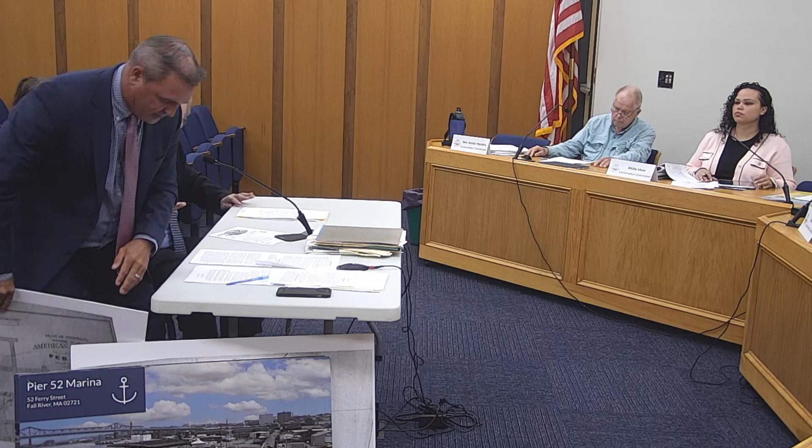So for the sake of having it made, I figured I'd at least show it, because we all know it. This goes back to 1840, and this is the bottom of Ferry Street. As you can see, in 1840, American Linen already had a large building for their industrial use. And since 1840, it's been a variety of things. The most recent was an oil terminal, where oil came in by barges, was recycled, and then left by truck. That oil terminal went out of business and closed down.

And I would suggest to you that under the statute, that seems to be an unproductive property, and what we're here before you for is to revitalize that property.

The issue when constructing on the water, below mean high water, is whether the land under the ocean contains shellfish. Now, statutorily, 310 CMR 912, the proposed project is a water-dependent use. A water-dependent use is described as marinas, boat basins, channels, areas, or other commercial and recreational boating facilities. And what that means is, if you are a water-dependent use, you are allowed to do these activities even if the land does contain shellfish.

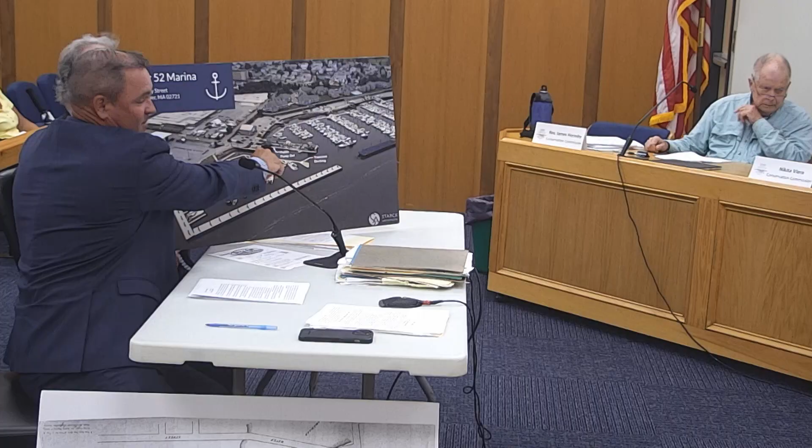There was a CSO outfall pipe in that area, correct? Down the center of Ferry Street. That's right. Has that been eliminated, or is it still potential? Still active, and it's probably one of the largest in the city.

I'm just concerned how that's going to impact your operations - it's right here, under this pier. And this project doesn't involve any dredging, correct? No, I understand that.

Paul could attest to it, it's really only an issue when we get a serious rain event. It usually takes 8 to 10 days to bring the water back in, and during serious rain events there's not too many boaters or public around. I was just curious, thank you.

It's valid that you bring it up, but I think that goes more to the shellfish issue. Well, no, this is - of course, right, it does, I understand that. I'm sure nobody's picking shellfish near the city outflow. No, I understand.

Does the board have any other questions? I know, Dan, you had some. Is there any neighbors, any abutters, in favor or opposed? No.

So a month ago, I sat down with Mr. Lund to go over the first plans that were submitted, and asked for a few items to be added to the plans, which some of them have been. We received revised plans on Thursday - I just got them today because I was off last week. So I'd like the opportunity to sit down with Mr. Lund and his engineer, nothing regulation-wise, it's strictly detail-oriented with regards to the plans and information that should be on the plan set, but nothing that would preclude you from voting once you get a file number.

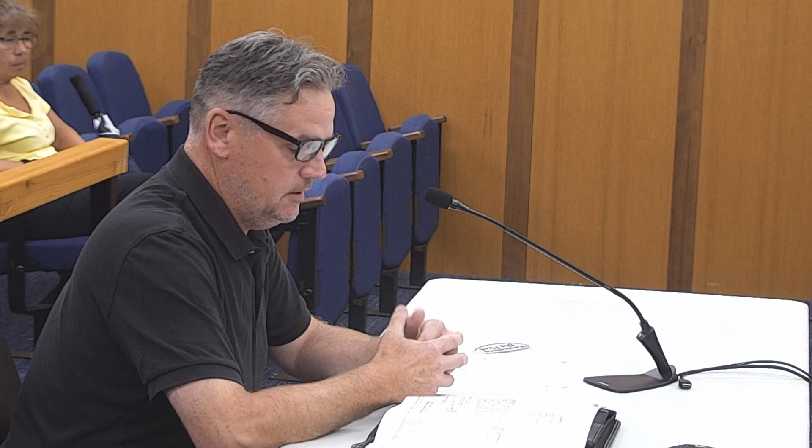But as you can see, there's a very small amount of work proposed here. It's just isolated in that one corner of the property. The shed itself is going to be put on concrete supports at each corner - I'm sorry, I think there might be 6, probably one in the middle as well. Just sonotubes put into the ground to pour concrete, put the shed on it. That's it, pretty basic, pretty straightforward, not a lot to it. Happy to answer any questions. It doesn't involve relocating anything that's on the site now. It's all within the limit of work that was previously established when the lot was developed. So I have no issues.

Any issue from the board? Questions? Okay, can I have a motion to - any abutters? No abutters present. Okay, can I have a motion to approve?

So moved. Seconded. Roll call? Aye. Aye. Aye. Aye. All righty, thank you.

Next is a notice of intent, SE-24-822, owner applicant Commonwealth of Mass Department of Fish and Game, City of Fall River, project location 0 Sheridan Street, assessors map is E-25-0049, filed by LEC Environmental on behalf of applicant. Proposed project includes upgrading existing stormwater drainage infrastructure, increased functionality, and improved water quality in South Watuppa Pond. This was tabled from June 5th.

Thank you, is it possible to hook into the computer? Yep, so it's just that - there's a cable right there, hopefully you have that. We often find that we don't have matching inputs and outputs. Good. Oh, great, can't see that, thank you.

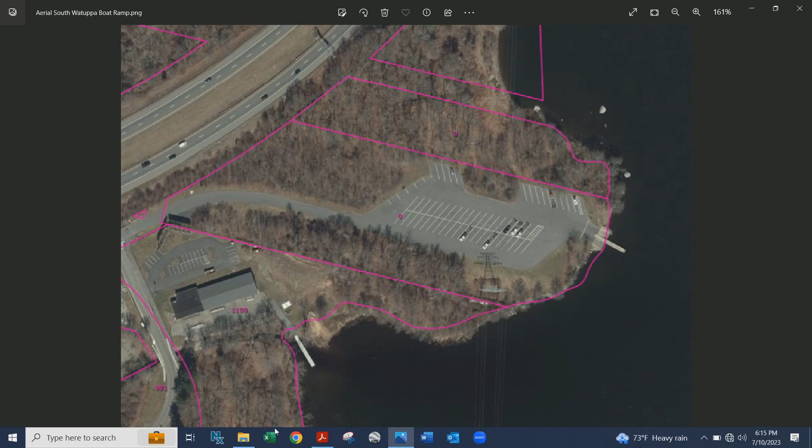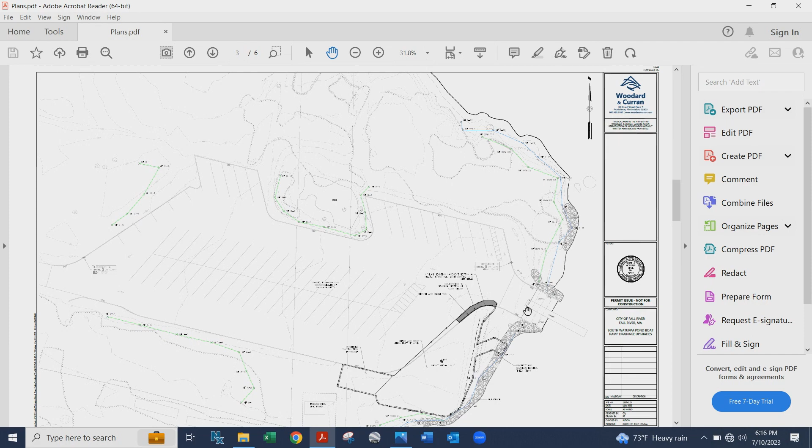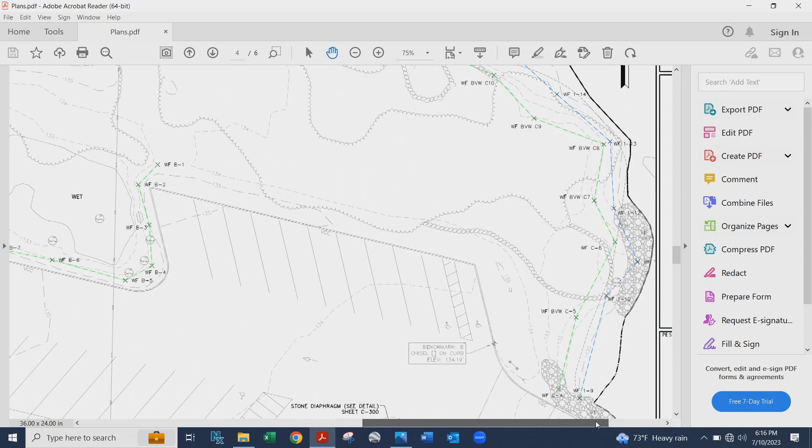Here we have the proposed conditions of the stormwater basin. Zoom in a little bit. The main components include a stone diaphragm, a sediment forebay, the basin itself, and the outlet right here.

The mitigation measures implemented during construction include silt fence around the construction site, as well as silt sock surrounding any stockpiles on the property during construction of the basin. That's all I have for my presentation.

Happy to answer any questions. Just for the record, Paul Ferland, Administrator of Community Utilities, overseeing water and sewer.

This project came up in relation to the water quality studies we've been doing on South Watuppa Pond to improve water quality. There were 4 projects identified in our Phase 1 study on South Watuppa: this one, another near Cherry Lane off Lake Avenue, a third in Westport originally on Tickle Road which we moved to the Plymouth Ave area in Westport, and also the Sucker Brook stream and wetland improvements.

In relation to this particular project, it was identified to reduce the phosphorus and nutrient loading from the runoff that comes from the large parking lot area. Originally, when this parking lot was constructed, there was some very small remediation done, what was required at the time. This is a little bit larger and will remove more of those phosphorus and nutrients.

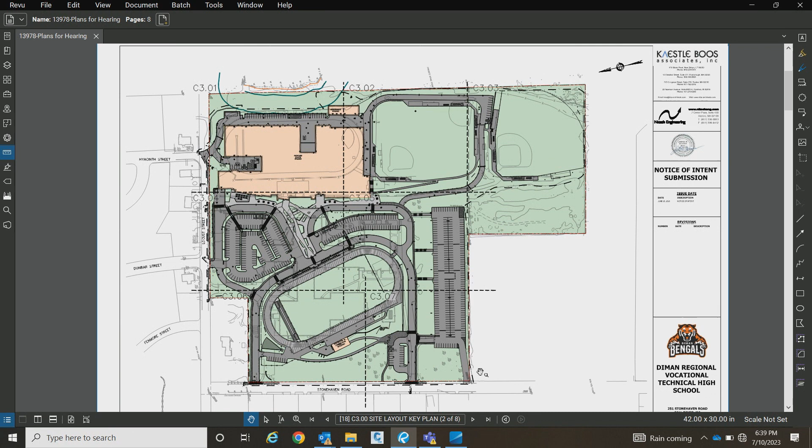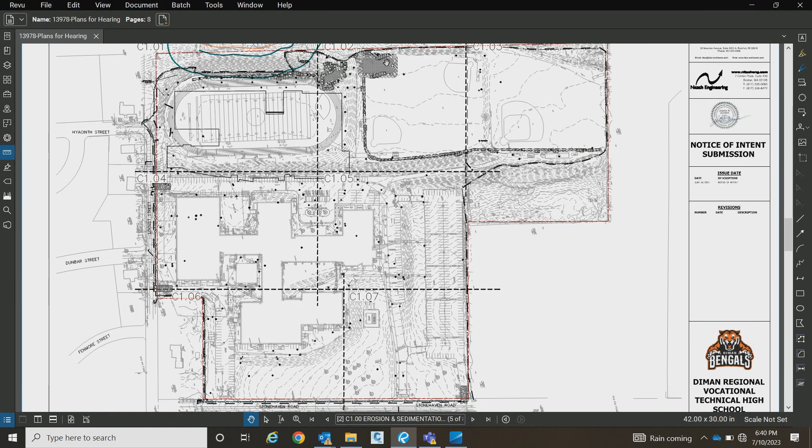For a closer look at the area around the 100-foot buffer, we have a temporary drainage swale for the construction period located just at the top of the slope and along the 100-foot buffer to the wetland. This is going to intercept runoff from the construction site and bring it to the south to a sediment basin located here. This will allow us to remove some of that TSS, total suspended solids, from the stormwater runoff before it's discharged into the wetland in that interim condition before we have our full stormwater management system built out. And you can see these two slopes that I pointed out before that are a little steeper will have that steep slope stabilization on them.

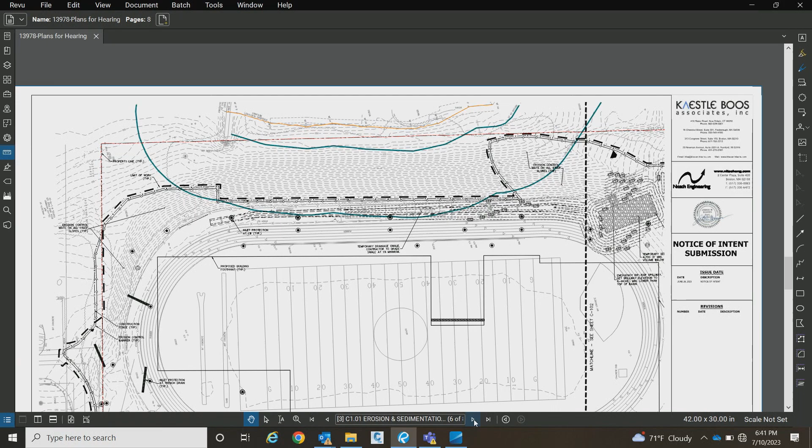So the last thing we're going to touch on for now is our stormwater management system. This is a large site. In the existing condition, we don't really see much stormwater control. We don't have any treatment for the stormwater or peak rate mitigation. So we are proposing a robust stormwater management system to provide both of those.

Our main discharge point for the site is the wetland at the northeast corner of the site. We have stormwater runoff that goes overland to Stonehaven Road and Locust Street. Both eventually discharge to this wetland as well through overland flow. So the wetland really is our main design point. There is a small portion of the site along the south that runs off to the south, but the majority of it is up here.

When we look at our design points, we're looking at each of them individually and then as a total as well. The site is within an outstanding resource water area and a zone B, so we are providing the stormwater treatment required of that, which I'll get into in a little bit.

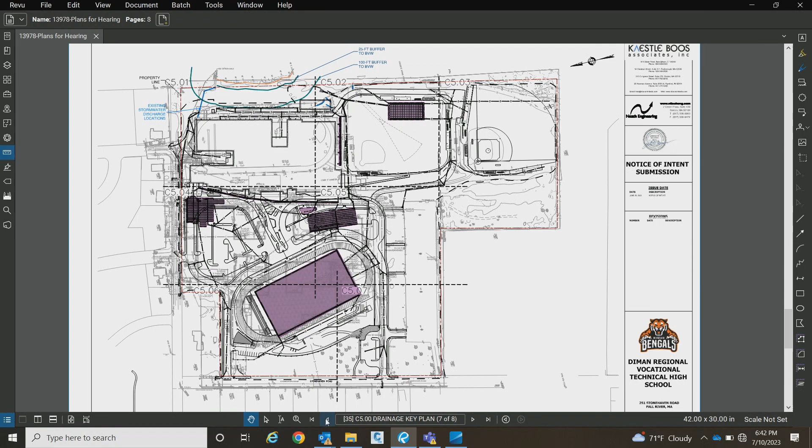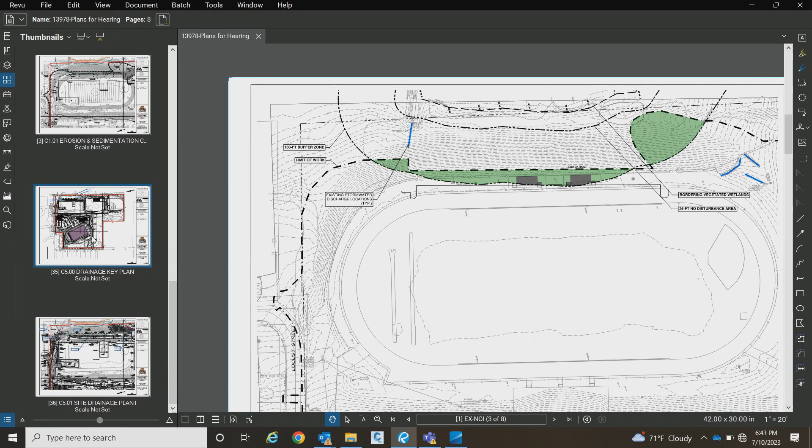So in the existing condition, I'm just going to flip back here real fast. You can see these blue lines that I've shown here are where we have our existing discharge points to the wetland. So we have a culvert that discharges here, 2 concrete swales here, a pipe discharge here, and there was a headwall with a pipe discharge here as well.

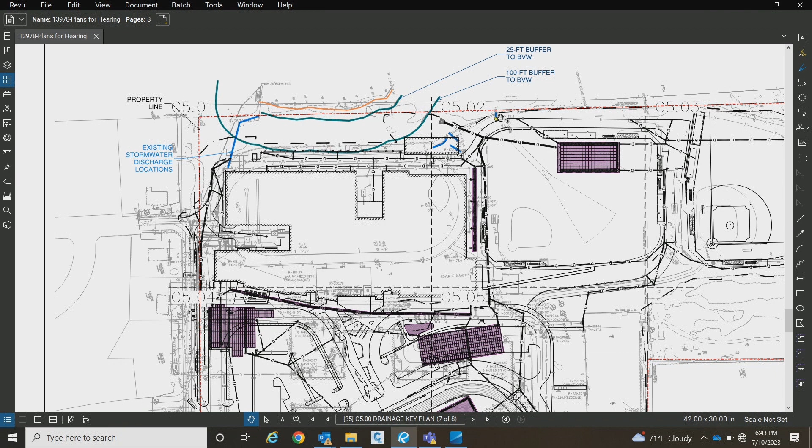In the proposed condition, we are looking to consolidate that. We're going to maintain this existing culvert and then connect to it upstream of the 100-foot buffer. And then we're going to remove these 4 discharge locations and consolidate it into one main discharge.

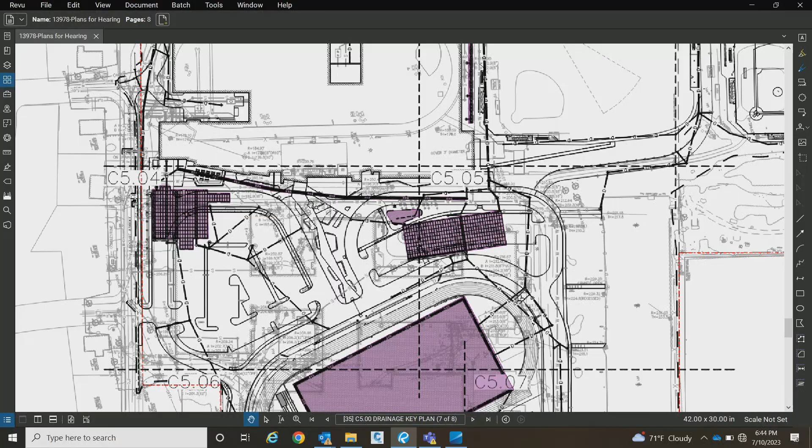The pink squares shown on this site plan are our subsurface infiltration systems. We have 6 of them: one below a field here, one below the football field here, 3 below the parking and driveways, it's kind of hard to tell if this is a long linear one as well, and then 1 on the lower area of the site here. And then this purple circle is a bioretention basin.

So we're using the subsurface infiltration systems and the bioretention basin to remove our pollutants, removing TSS and phosphorus. We're getting over 80% TSS removal and over 60% phosphorus removal before we discharge. We're infiltrating a significant amount of water using these systems, and we're also reducing the peak rate of runoff to this wetland by a pretty significant amount.

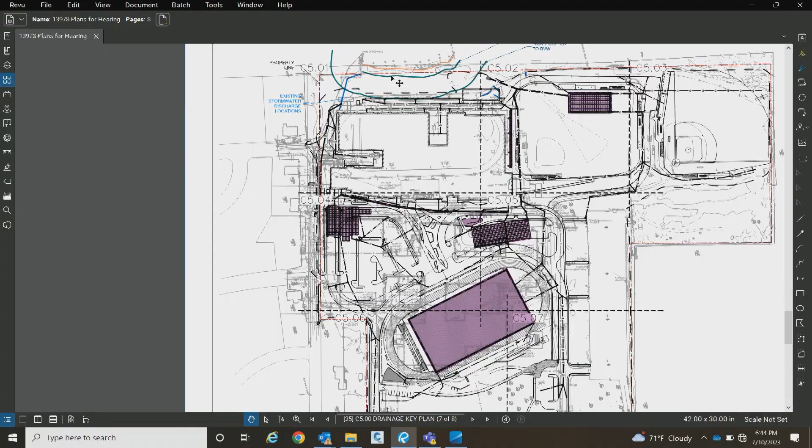Just to zoom in a little closer on that area for the 100-foot buffer, you can see these 2 areas highlighted in blue. That's where the stormwater will be discharging to the wetland. Again, this one is an existing connection that we're maintaining and connecting upstream, and then this will be a new one that we're stabilizing with a riprap apron.

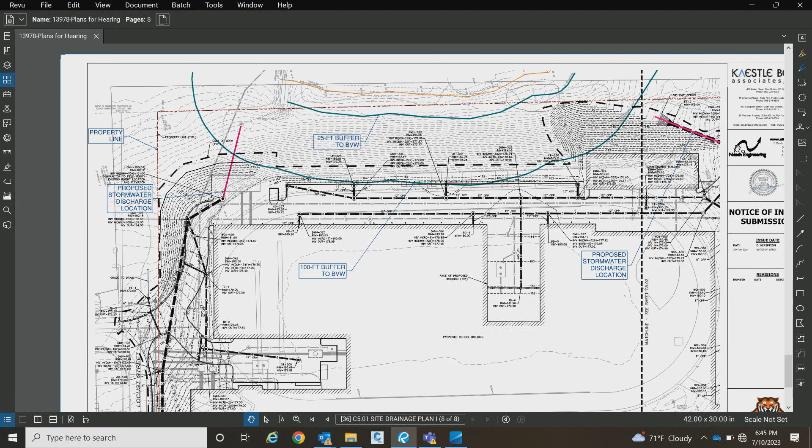And with that, I would like to ask you guys if you have any questions for us.

Yeah, I have one, but I think it's from Mike or Paul. So that wetland area, does that discharge into the interceptor basin, do we know, that then leads to South Watuppa, or? Yes, it crosses underneath Route 24 and the culvert and then goes into the interceptor basin. And that's a Mass DOT-owned culvert, and we've had interactions with them regarding any required state access permits or stormwater permits to discharge to that culvert, and they've confirmed that no state permitting is required.

So how much, so you're adding 3.1 acres of impervious surface? 3.2, 3.3. So will that be directed, will everything go toward this, or will some be directed to the city's sewage system on Stonehaven, or is it all going to go back? The majority of the site ends up coming to this wetland. It's a pretty insignificant amount that ends up going to the south, but it is mostly coming to this wetland.

Yeah, there's actually no closed drainage systems in the surrounding streets, so it ultimately kind of drains along the gutter lines and into the site drainage system anyways through the curb cuts. There's the parcel located along Locust Street, at the northeast corner where there's a pretty steep gradient down Locust Street, and the roadway runoff actually just kind of traverses right through the Locust Street right-of-way and even portions of their driveway, but ultimately makes it into the wetland.

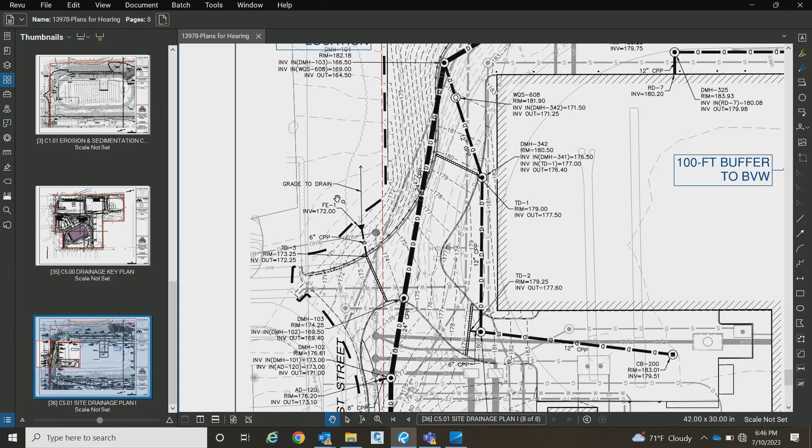Will the wetland, in a peak rain event, be able to hold what it takes in now with the addition of the three? We're plus or minus reducing the rate of runoff going there. Is the volume reduced as well, or just peak rate? I can double check that for you. I don't know the volumes offhand, but I have to imagine.

What was the total TSS that you're going to eliminate prior to entering the wetland? For the annual loading of TSS, we're reducing it by 85-86%, compared to the 80% required by the state. And we're providing 61% total phosphorus removal, compared to the 50% total phosphorus required, per the local and MS4 water treatment requirements.

It's safe to say that no phosphate removal exists at this time, nor any TSS removal existing? That's almost correct, non-existent.

Since you have that drawing up, and I haven't walked out there myself, but I will - is there the ability to improve on the existing outfall that you're keeping? Like, what's at the end, is it a flared end? Is there adequate riprap down here? Can that be upgraded? It's basically interconnected through a concrete channel from one culvert to the next, DOT owned. There's no flared end, it's basically just a square face head wall.

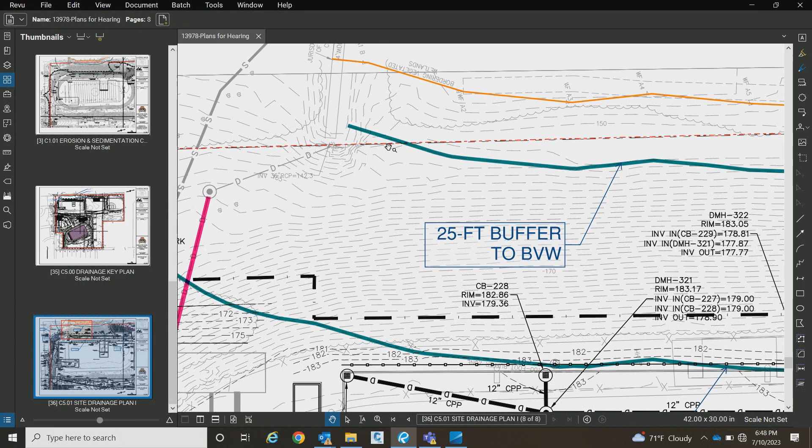We could coordinate that further if we think - I mean, Paul knows it better than I do, so he'll be reviewing this as well through site plan review. That's something we hadn't talked about yet, but I didn't know what the condition of it was - restoration, or energy dissipators, we could discuss that further. But based on our analysis, we know we're reducing the peak flows and volumes, and we understand there's no flooding concerns in this area, so we haven't evaluated it further for downstream issues.

And this will handle rooftop runoff as well? Yeah, exactly. So when you analyze the site, such a large site, and consider the phosphorus reduction requirements, you need to break up things in certain ways. The site is actually pretty wonky if you're familiar with it - the field is much lower than the developed site where the existing building is. So the new building plays into that, where the main entrance is on the second level, and the eastern portion is recessed a bit towards the wetland.

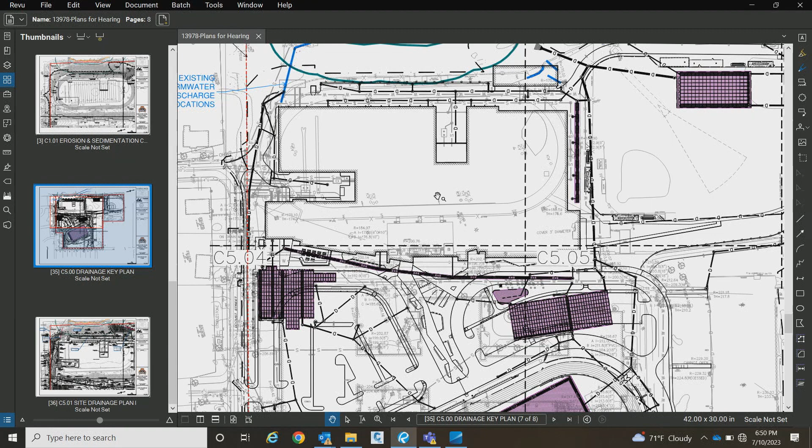So we've broken up the stormwater systems to play to that, where the western portions of the building roof discharge to the high side on the west, and the eastern side of the building on the low side discharges to the east. That's why you see it broken down, and those linear infiltration trenches are designed to get us the remaining water quality treatment required. Most of the water quality treatment will actually be developed from the roadway vehicular surfaces and not so much the building roof, but you still need to treat that.

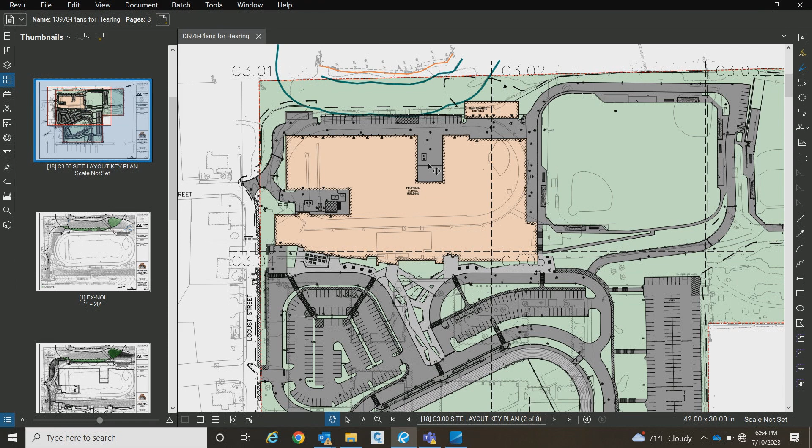Okay, so it'll be away from where it is right now - it totally will be away, okay. It will probably be a small trash area, that Brittany was pointing to where you see the C3.04, but that will just be a small trash area for the restaurant. Just a single rollaway bin, and there'll be an enclosure.

And you probably have something for the football field too, because if you have football games, you're gonna have to - they'll probably have movable trash bins, but nothing as far as larger scale, like the dumpsters they have right now.

Like I said, I'm just concerned with the stuff still coming into my yard. And then I was just concerned also with the demolition time, since I'm right by the auto body - I just wanted to make sure we find out what was going on with that.

What I would recommend is that the project team, with the contractors, put out notices regularly to the neighbors, as well as having neighborhood meetings regularly, so that if you want to reach out to the school, they could help you and get you on an email list for communication on that.

That sounds good. The project team understands the encroachment towards Locust Street, so there's a big effort with the landscaping to help screen that whole corridor, looking south towards the building and parking areas. With the siting of the building, that was one thing we were very sensitive to, being a good neighbor in a residential area.